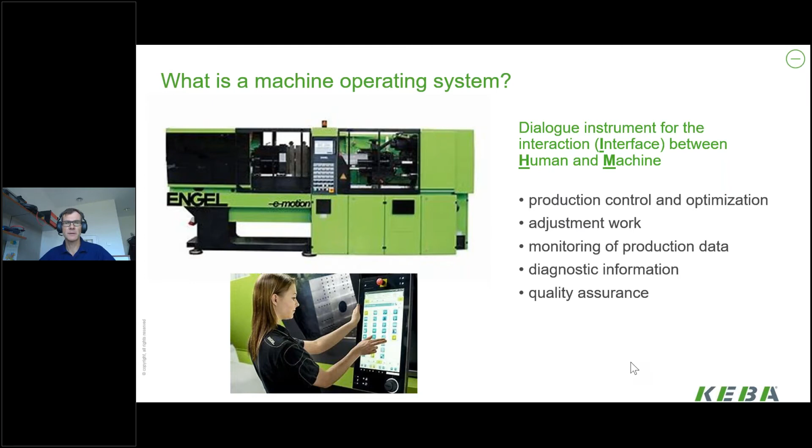We typically do something around the control of production and optimization. We do some changes, some optimization, but we also want to know what the machine is doing, how the machine is doing, and we want to learn from that and get better, and in total have assurance about the given quality. Our product portfolio, KeTop, is a solution which covers stationary and mobile devices.

In the stationary devices, we have 10-inch and upwards up to 24-inch devices, and on the mobile devices we cover the display, the screen size below that. So the goal is that the operator on the machine has the best solution for his machine and for his needs, whether it's a large machine, whether there are many different machines, or it's a robot operation.

The idea is that typically there is, in many cases, a stationary operation, but on some areas of the machine, especially when the machines are larger, then in many cases a mobile operation is needed as well.

Sometimes the situation is that there is only one worker for more machines or for a very large machine, and then it makes sense to provide different connection points. And on those different connection points, it's important that the operator gets the right information about what he is doing there, and the location of that connection point is given to the application, so the application can decide accordingly.

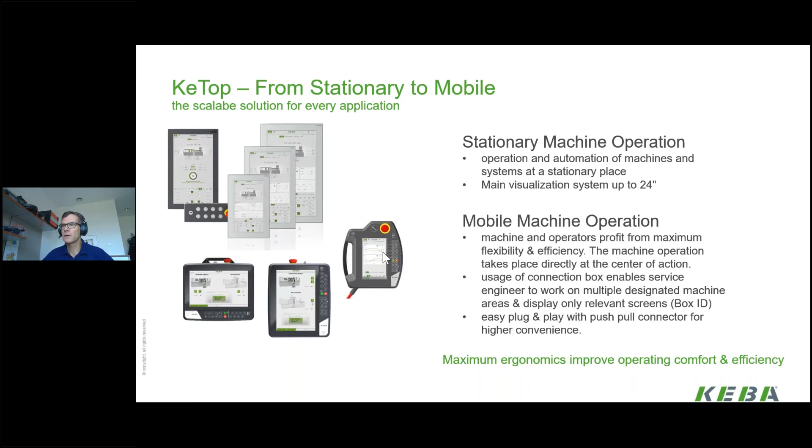So our goal is to provide this set of different solutions, and in the pictures you see examples of some devices, landscape and portrait, with different application examples.

Generally we have the situation that the operator needs to work directly on the machine, whether it's a robot, a classic machine, or a production line. There he uses the device as a teach pendant for setting up, and of course there he needs to have the safe operation mode.

But sometimes he does not do an operation, he just wants to perform some monitoring tasks. He needs to read some manuals, some PDFs, some instructions about the next steps, and therefore you need a capable device, in many cases a Windows operating system where you run different applications.

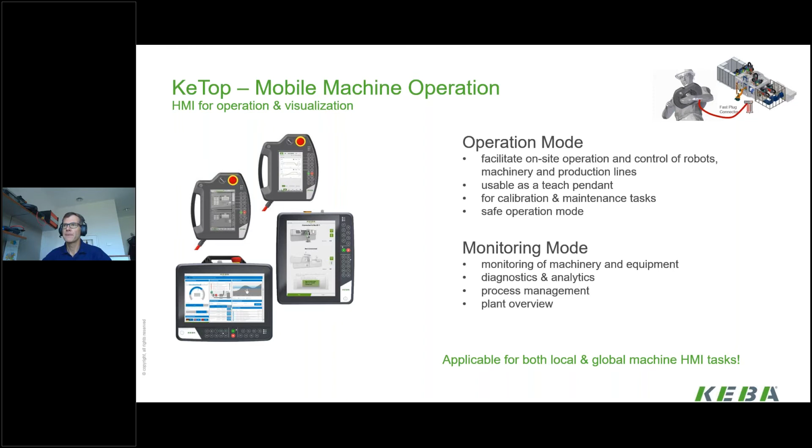So the goal and the idea is that the device can not only run the machine, the local machine application, the idea is that on the device other applications might also run. So basically the approach is to have one HMI to cover all the tasks around the machine.

With that, we give the main tool into the hand of the operator in order to have everything he needs on site. He can be guided where to go next. He has the possibility of mixing safe and non-safe operation.

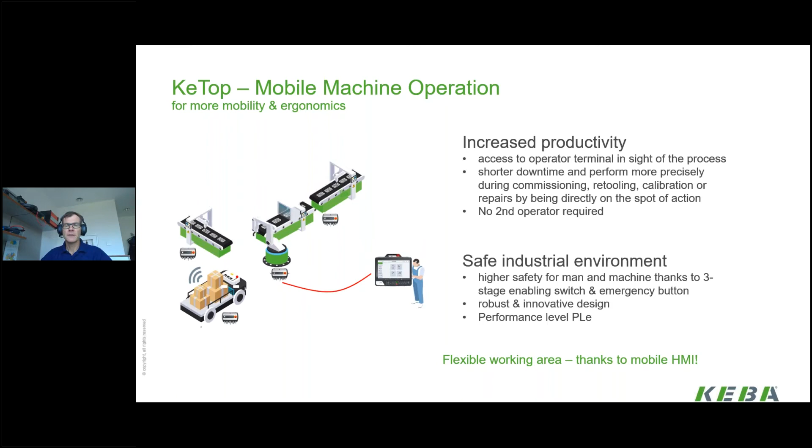And the basic idea is that the automation degree of machines is increasing and the number of operators on site at the machine is decreasing. So the big question is, with this automation level increasing, where are the workers? And how much HMI is really needed?

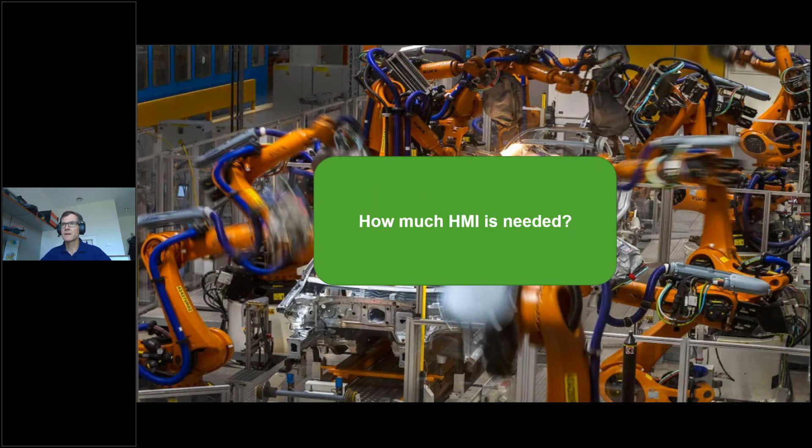And therefore the cost aspect issues are starting to come into place. And with that, a situation where you have connection points for different machines, but not terminals for each machine, comes into place. So the idea is that, not in all cases, but sometimes it could be possible that there is one operating terminal per worker, per operator, and not per machine or per robot.

But for that, a solution, as I briefly mentioned before, a hot plug solution is basically needed. And some other things come into place.

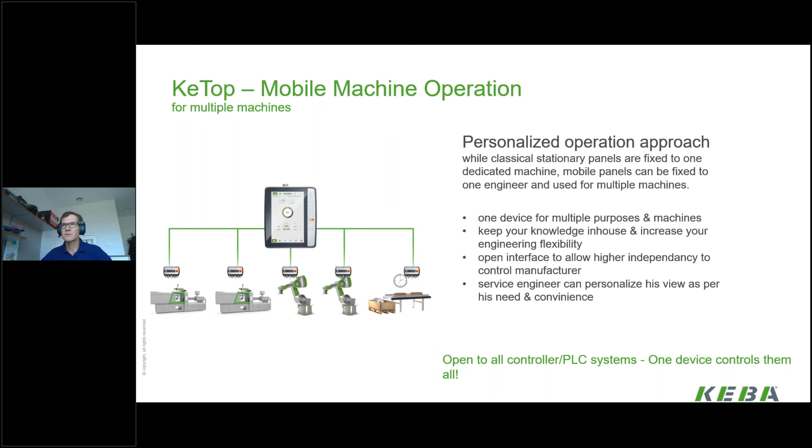The topic is that machines typically have different interfaces, different communication possibilities, different communication protocols, drivers, and different PLCs. So the HMI solution needs to be open to a large set of different PLCs and controllers. Our goal is to provide such a PLC-neutral device, and I'll explain more about that in a few minutes. But first, let me give some ideas about where such a device could be needed.

I'll briefly summarize the use cases where mobile HMIs are typically used. From the life journey of a machine, there's the setting into operation, the commissioning phase. In many cases the HMI is needed very intensively during that period, maybe the full day. But later, when the machine is in production, HMI tasks can only be performed when the machine is not running.

It's a little different from case to case, but during production the machine should produce and no adjustments should be done except when needed. So it depends on the stopping time of the machine. It could be a consideration that the HMI remains on the machine, or to save cost, to switch it between different machines. In this case, a hot-plug solution would be interesting.

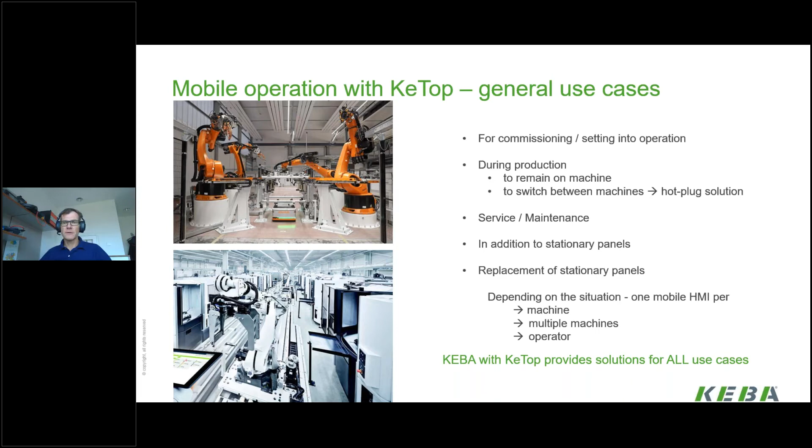So this gives you a short overview about the different use cases of mobile HMI operations.

Now, very quickly, the main three devices we can offer, which most customers choose for tasks where you operate the whole day, specially dedicated for robots: we provide a 7-inch portrait format device, and for more general purpose situations, the 10-inch devices. In this case again, the portrait format T150, 10-inch device with PCT. This portrait device is mainly for collaborative robots in the robot area, and the T155, a 10-inch landscape device, is mainly used for machine operation.

High resolution and good flexibility in terms of processor capacity are important, with different storage capacities. In order to be open for many different solutions, we provide the Windows 10 IoT operating system as an embedded solution, so that security concerns are solved and encapsulated. The big advantage is that basically 95% of all applications can run under Windows 10.

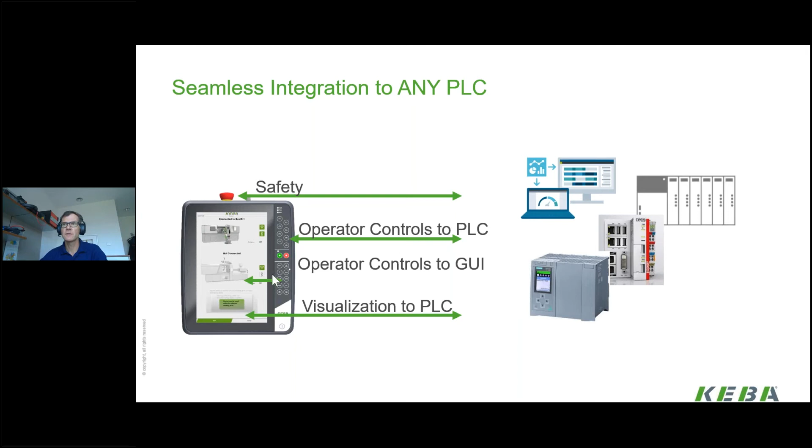Sometimes there is also the situation to communicate from the operator control to the graphical user interface, but this is a more seldom situation.

Those software solutions combined with the different hardware solutions mentioned already cover four large areas. One is to have a local operation on a machine. The next is a large machine where one could reduce stationary panels or reduce terminals at all. Another field is an application of changing from one machine to the other, or to use a terminal for more than one machine.

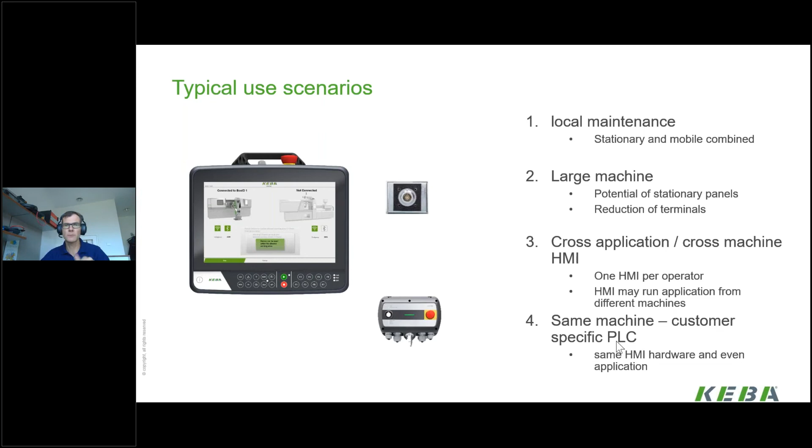This is the personalized approach. And there is also the use case that you as a supplier have always the same machine, but for different countries or markets you may use different customer-specific PLCs or PLC manufacturers, while you want to focus on the HMI development only one time. That situation may also be covered.

So let's look at some sample projects. One is the case of a small or medium machine with a stationary panel somewhere in the central operator area, and some secondary work areas. In a standard use case, the machine was additionally equipped with smaller stationary panels. But the operator is only at position A, B, or C, never at more than one position at the same time, because it's only one operator on the machine.

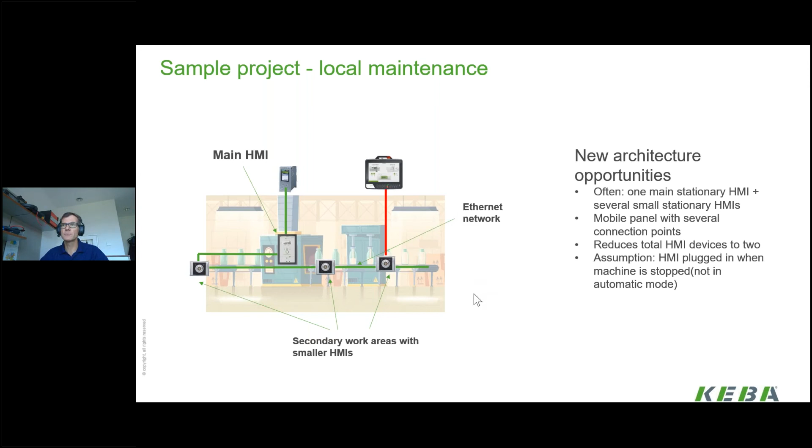The idea is to have only one mobile HMI. Maybe the working area is plus or minus a few meters, and it's handy to have a mobile device in hand. The idea is to provide several connection points, which in total reduces the number of HMI devices. Although mobile devices may be a little more expensive than stationary devices, they don't need to be mounted on the machine, and the number of terminals is reduced—so that could also be interesting in terms of cost reduction.

Another use case, where the so-called hot plug solution is more common, involves large machines—in this case a conveyor solution in a production line. There's one operator, and several stationary scattered HMIs that may have existed before could be replaced by connection points for hot plug solutions with medium-sized cables, allowing the operator to go from one point to the other to perform his work.

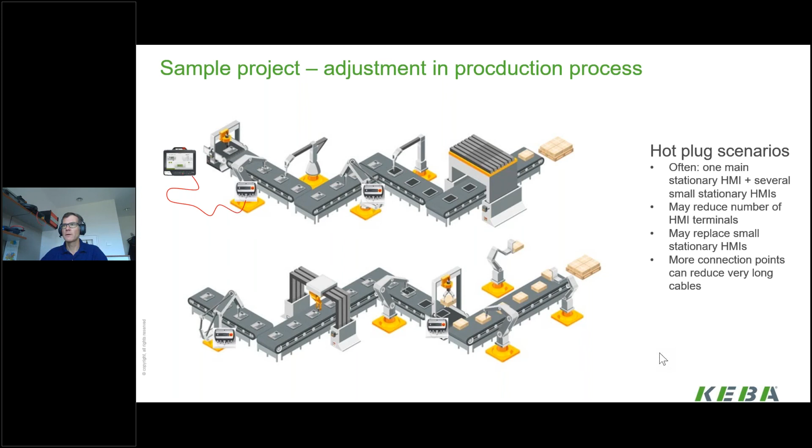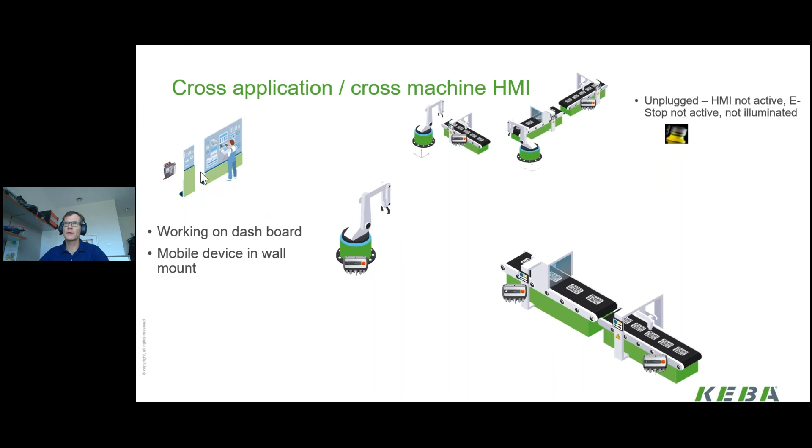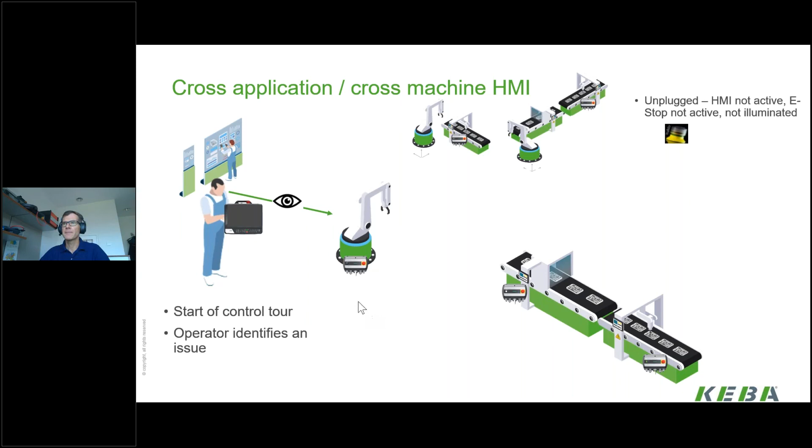Another possibility I'd like to present is the application from one machine to the other. Let's assume an operator is on a dashboard with a mobile device in a wall mount. He starts his control tour, identifies an issue at a machine, and connects there.

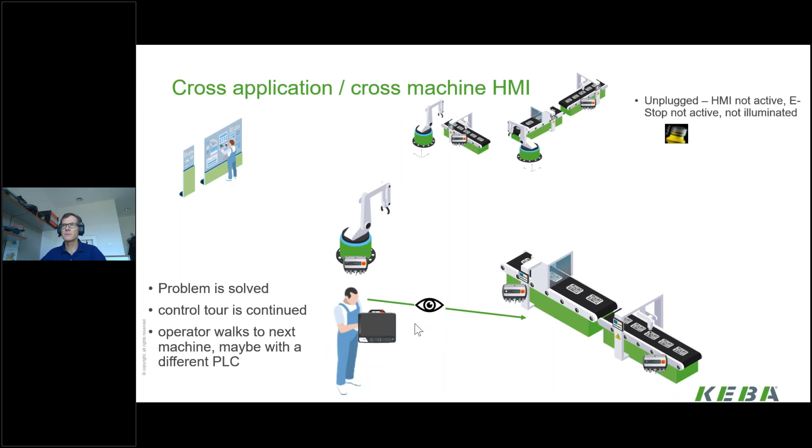The connection point is identified via the box ID, and the correct application for that connection point starts. Whether it's PLC A or B, the dedicated keyboard interface is activated, and communication is direct to that machine or robot. After the problem is solved, the control tour continues, and at the next machine the operator disconnects and the terminal is switched into safe mode. The illuminable e-stop is not illuminated, since it may be a different PLC, and a different connection is started—then the keys on the device suddenly have a different communication channel to the PLC than in the example before.

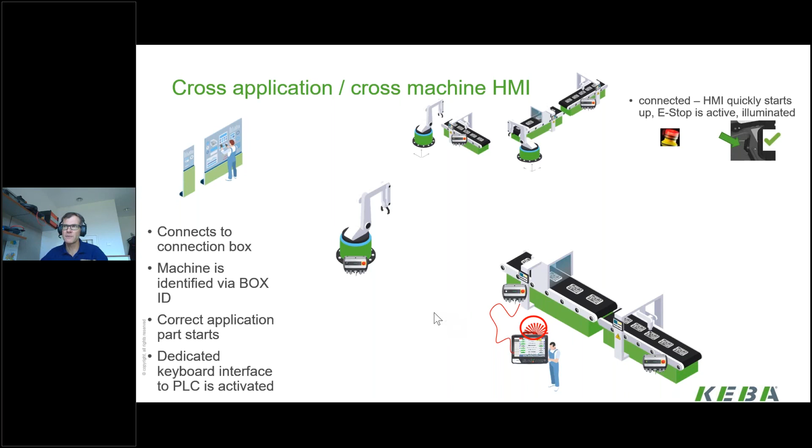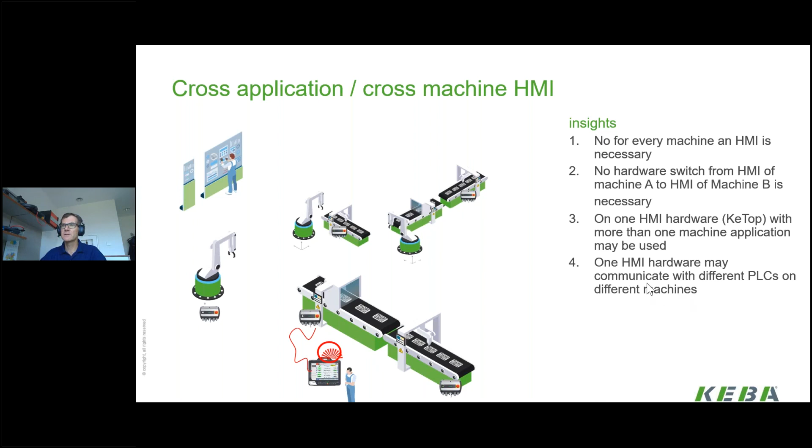So this is a possibility for using the device across machines, even with different applications—it could be the same application for different machines, or different applications for different machines. The conclusion is that not every machine needs its own HMI, and the operator doesn't need to switch hardware from machine A to machine B. He's already used to this hardware—it's convenient, he knows where the keys are, and he only needs one hardware for different PLCs.

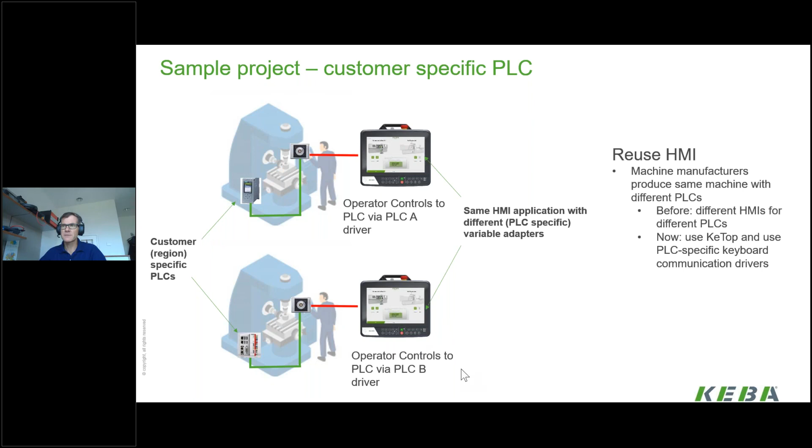The last example, as briefly addressed before, is when a machine is equipped with PLC A for one region, maybe Europe, and a different PLC for another region, maybe Asia. It's the same HMI application, and maintenance of the HMI application is very simple because it's only one—in this case the control interface is to PLC A, and in the other case to PLC B.

So that's just a short inspiration, and this brings me to the end of the presentation. I hope I was able to give you a short insight into the variety of different terminals and how to use them with different devices, and I hope this inspires you a little in considering your specific situation.